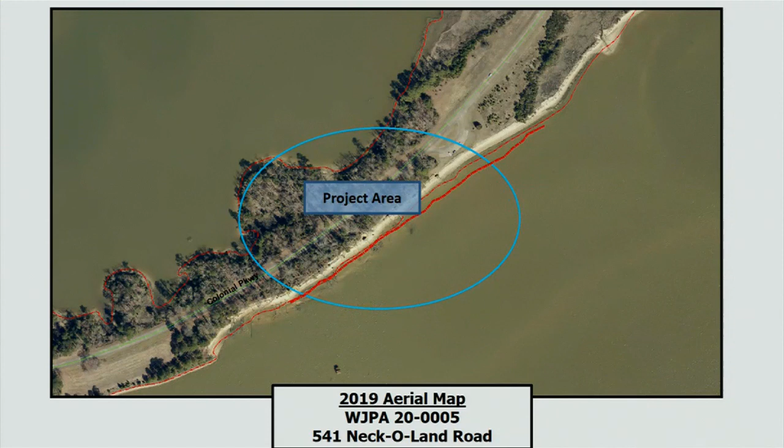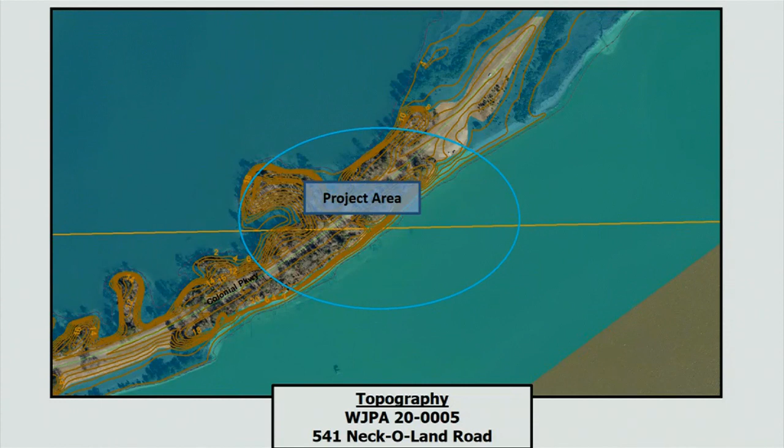Floodplain as it affects this property, and the topography. As it sits right now, it's a fairly steep bank with clear signs of incision and erosion affecting structural stability and safety along the beachway.

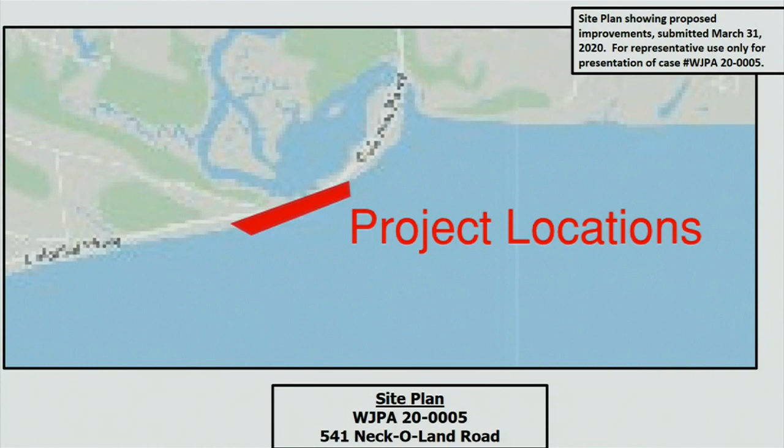The red portion above is the project location. Again, there are two separate locations, but in general, this is the project location. Location 1 above shows the first area in question. Structural stability of the parking lot shown above is the reason for the revetments in this area. A cross section of the sandbag revetments is listed above.

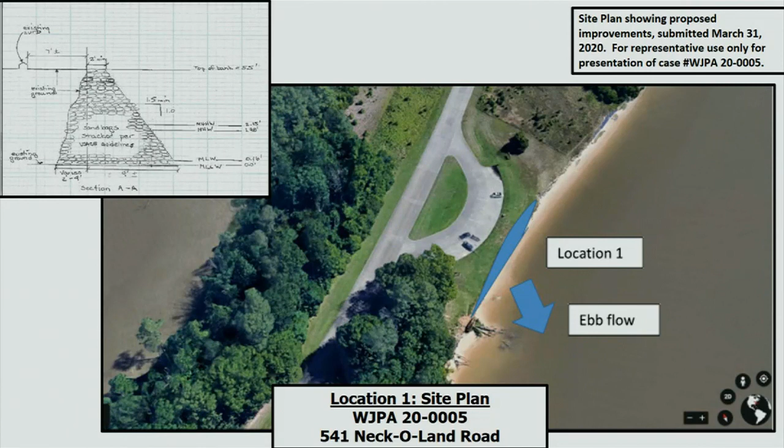And location 2, a couple hundred feet down the beach of the original location.

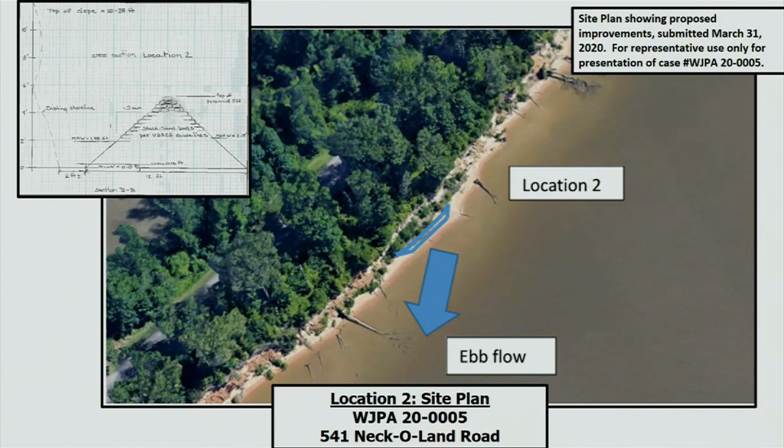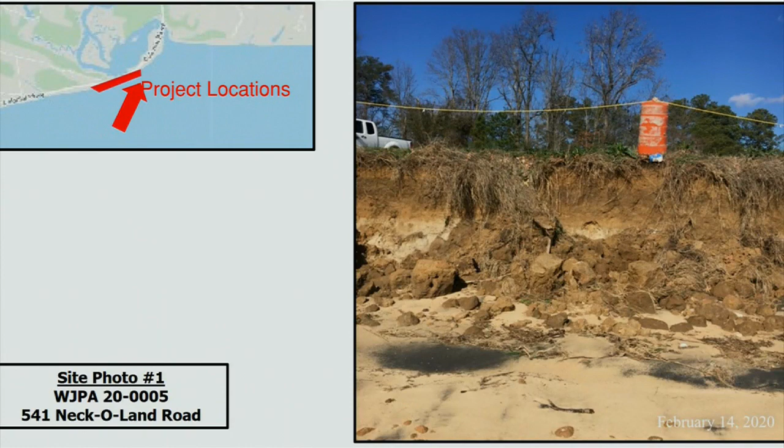Some site photographs of location 1, as you can see, just above the incision and the erosion, trucks parked in the parking lot. Moving down the beach, showing the erosion and the extent, you can see the downed trees, both furthering and inhibiting erosion.

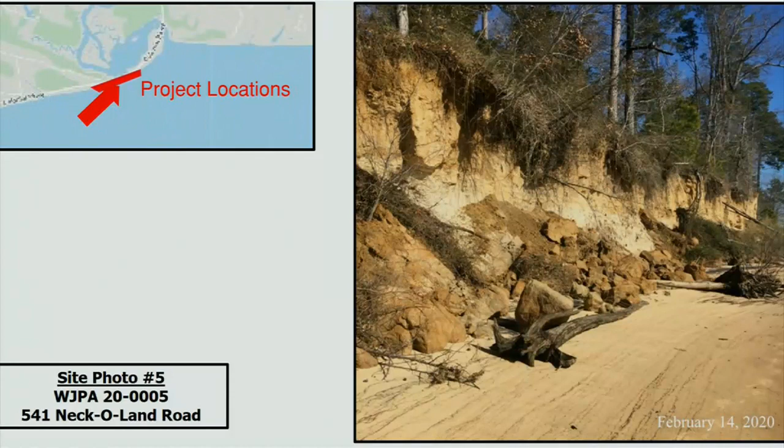And as we grow closer towards the extent of location 2, and coming back down the beach, that would be the last portion. This is a small breakwater system that is acting as an erosion prevention method currently at that portion.

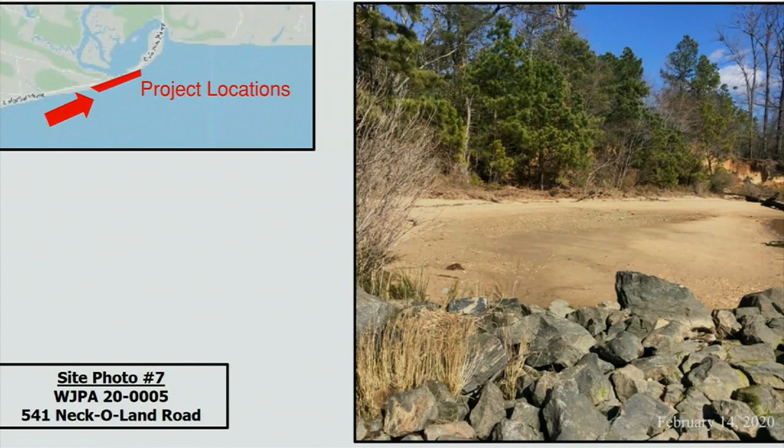Again, staff does recommend approval of this project, given that the applicant obtain all other necessary local, state, and federal permits required, that the development activities located in the special flood hazard area comply with Article 6, Division 3 of the floodplain area regulations, and this permit request become null and void if construction has not begun by May 13th, 2021, with written request for extension submitted to the Stormwater and Resource Protection Division no later than April 1st, 2021.

Now I'd be happy to take any questions the board has. Temporary, what does that mean? How temporary is this going to be? It looks to me like it's going to be there a long time.

Mr. Chair, I can answer that question. The Park Service does have the intent to put in breakwater structures in the future. It's funding dependent. The two locations they've chosen for this project, the first one protects the parking lot, and there is a structure on the bluff in the location of the second breakwater or revetment. That's why they chose those two specific locations. Thank you. Thank you very much.

What is going to be done to the erosion on the banks? Is anything at all, or are you just doing the sandbag revetment? Currently, it's just the sandbags, just armoring the bank.

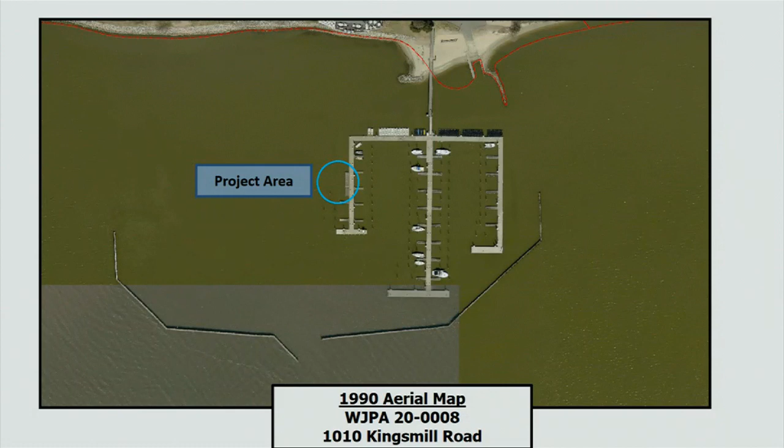As published in the Virginia Register, the revised wetland mitigation compensation policy and supplemental guidelines state that Virginia is committed to achieve no net loss in tidal wetland.

In order for a proposed project to be authorized to impact wetlands and compensate for the wetland loss in some prescribed manner, the following 3 criteria must be met.

All reasonable mitigative efforts, including alternative siting which would eliminate or minimize wetland loss or disturbance, must be incorporated into the proposal. The proposal must clearly be water dependent in nature, and it must demonstrate its need to be in the wetlands and its overwhelming public and private benefits.

Staff reviewed the application and finds that this project does meet all 3 of those criteria as outlined. As stated previously, there are no vegetated wetland impacts, thus no mitigation is required.

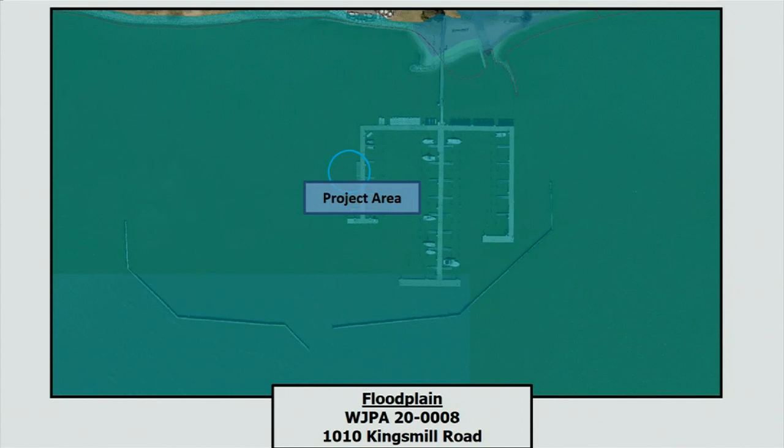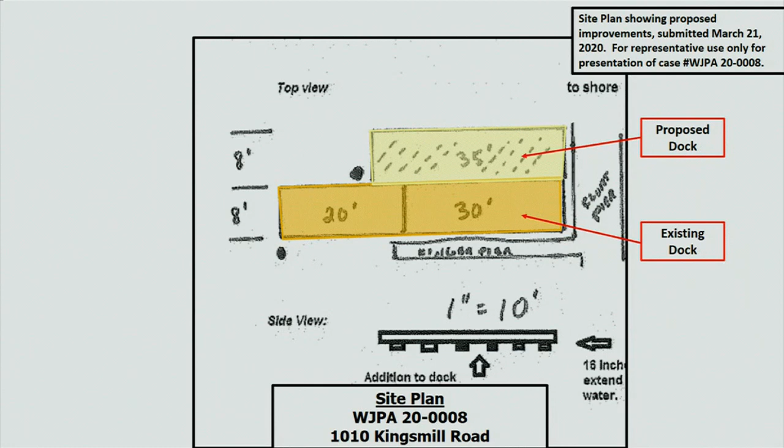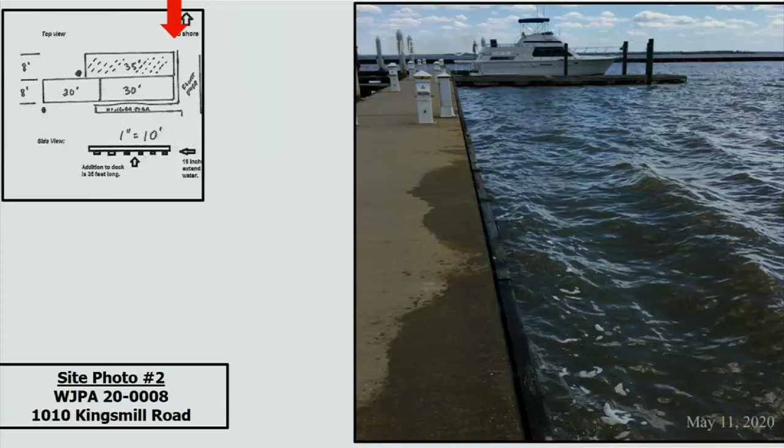According to the site plan submitted, there's an existing dock out there, and they want to add an 8 by 35 foot floating section immediately adjacent to it. This is a shot of that existing floating pier. In the permit conditions, staff does recommend approval.

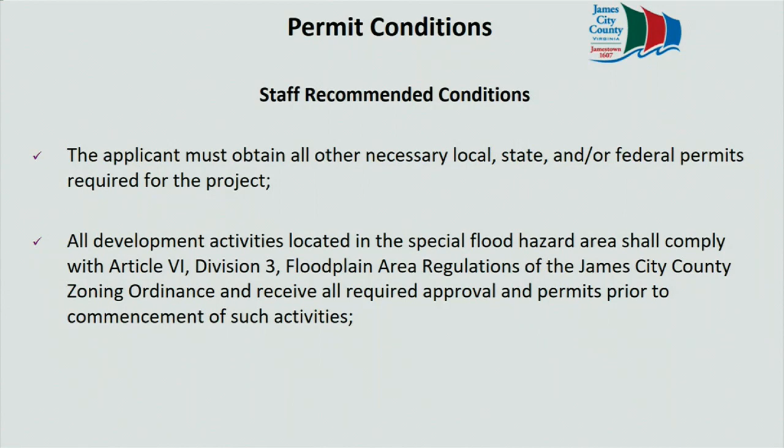The applicant must obtain any other necessary state, local, or federal permits as required, that any development located in the special flood hazard area comply with Article 6, Division 3 of the floodplain area regulations of the county, and that a site plan be submitted to the planning division due to the commercial nature of the marina.

The wetlands permit shall expire on May 13, 2021, if construction is not begun, and if an extension of the permit is needed, it should be submitted to our office no later than April 1st, 2021, 6 weeks prior to that expiration date.

I'd be happy to answer any questions the board may have regarding this application. Questions?

Thank you, Mr. Wilson. At this time, we'll open the public hearing. Anyone here wish to speak to this application? Seeing no one come forward, we'll close the public hearing.

Discussion from the board. How do you feel? Straightforward. You ready to vote? I'll make a motion.

Mr. Chairman, motion to adopt the resolution to grant the permit for Wetlands Board case WJPA 20-0008 at 1010 Kingsmill Road. Mr. Waltrip? Yes. Mr. Roadley? Yes. Mr. Guessman? Yes. Mr. Apperson? Yes. Mr. Dunn? Yes. Motion carries.

Board considerations, we have a presentation.

Good evening, gentlemen. Before you is a resolution to adopt a remote participation policy for the Wetlands Board. Given the current health crisis, staff thought it would be appropriate for the board to adopt this policy in the event a board member wishes to participate remotely.

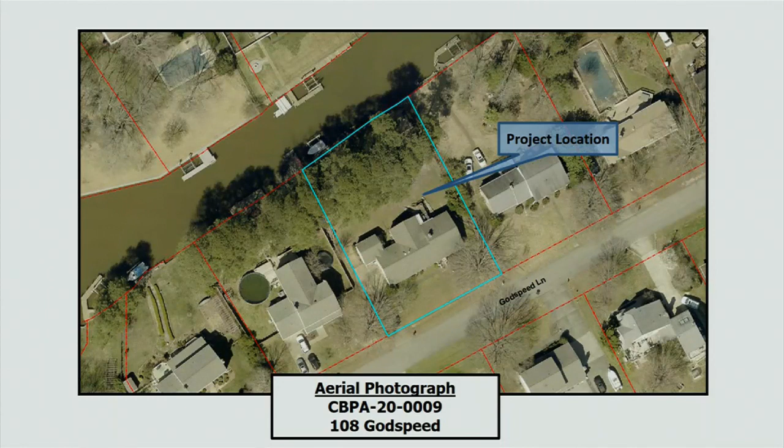The applicant is proposing to construct a 730 square foot deck to accommodate future accessibility, including a ramp to access the proposed upper deck from the proposed lower deck. A hot tub area is also included with the proposed lower deck. There is an existing 250 square foot deck on the property that the applicant intends to remove as part of this project, equating to a total of 480 square feet of new impervious surface associated with this project proposal.

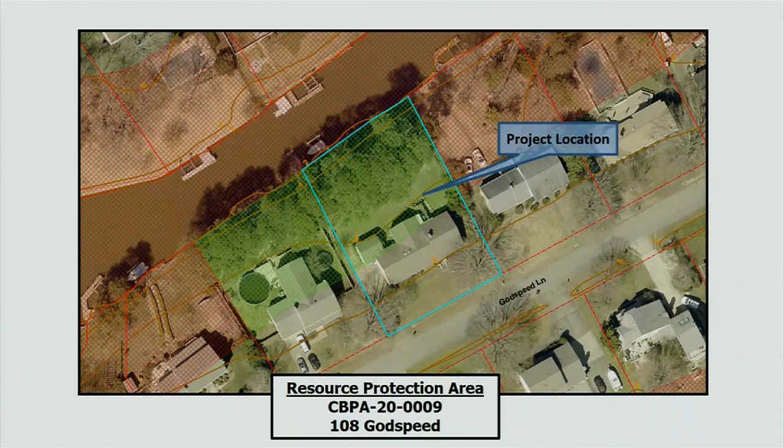The applicant has proposed the plantings of 2 canopy trees, 4 understory trees, and 6 shrubs. Staff has evaluated the application and exception request for the construction of this deck. This application meets the ordinance conditions in sections 23-11 and 23-14 and should be heard by the board because the deck is accessory in nature.

The board may grant exceptions to 23-7 if the application meets the following 5 conditions. The board may grant the exception request if it is the minimum necessary to afford relief.

Granting the exception will not confer upon the applicants any special privileges denied by Chapter 23, the Chesapeake Bay Preservation Ordinance of the James City County Code, to other property owners similarly situated in the vicinity. The exception request will be in harmony with the purpose and intent of Chapter 23 of the James City County Code and is not of substantial detriment to water quality.

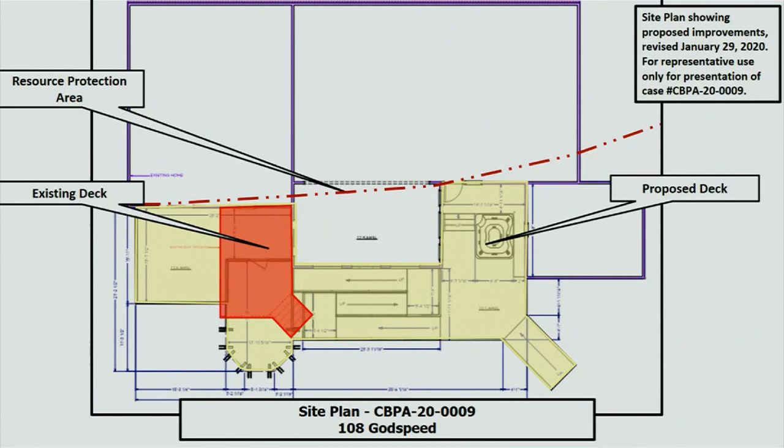Above, I have some site photographs, in addition to a 3-dimensional site plan that the applicant has provided to us. Again, you can see the ADA accessible ramps going from the ground to the lower deck and then up to the higher deck.

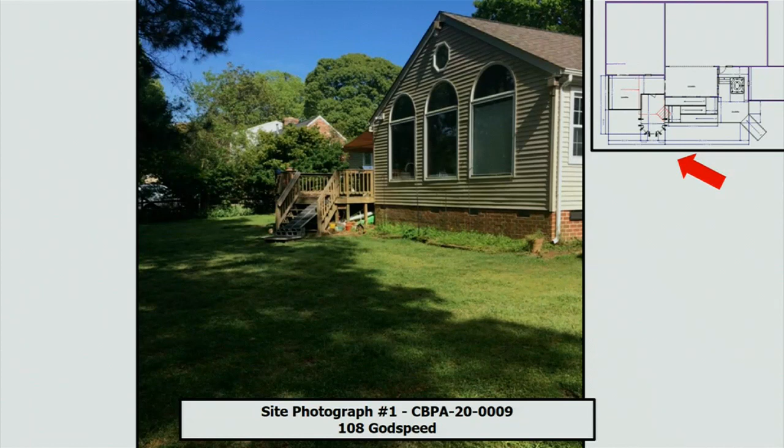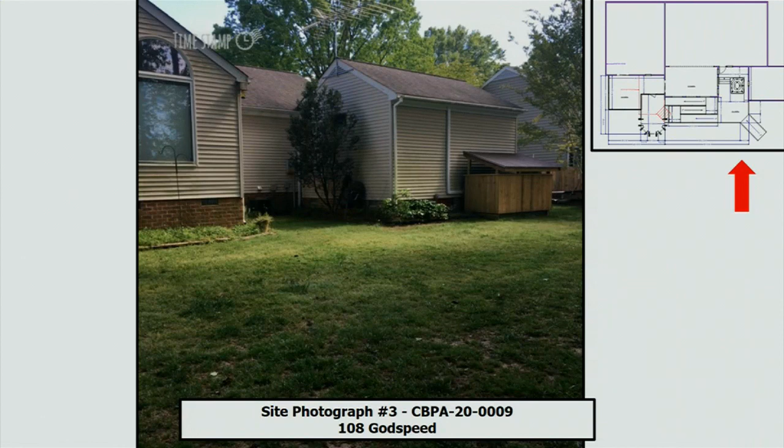Above you can see the existing deck that plans to be replaced. From the side of the house, looking from what would be the lower deck up into the higher deck. This area would be the lower deck, the ADA ramp, and the hot tub area. Again, the existing deck that plans to be replaced with the seating area. And viewing from the opposite direction, so from the higher deck down to the lower deck.

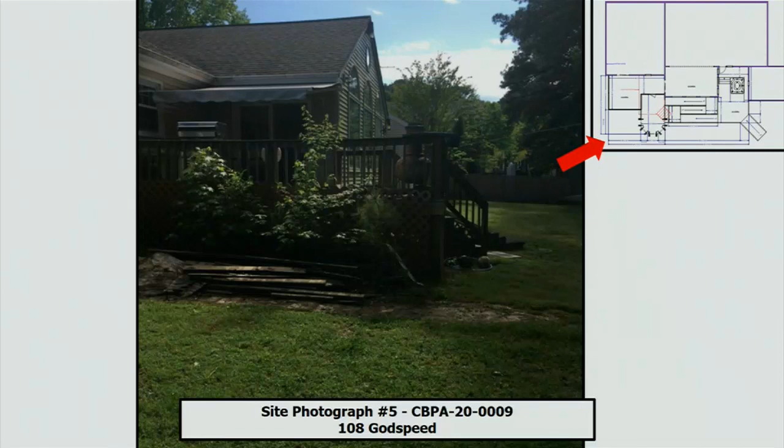Again, should the board wish to approve this exception request, all necessary local, state, and federal permits will be required. All development activities located in the special flood hazard area shall comply with Article 6, Division 3 of the James City County Floodplain Area Regulations.

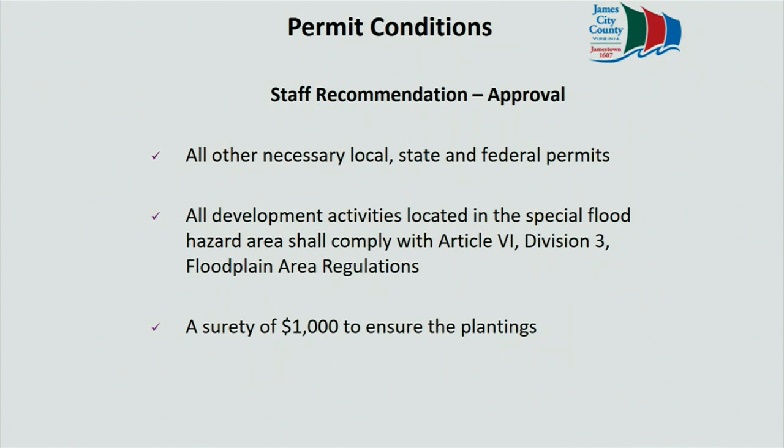That a surety of $1,000 to ensure the plantings of mitigation is required. Mitigation of 2 canopy trees, 4 understory trees, and 6 shrubs as provided by the applicant. And this exception request approval shall become null and void if construction has not begun by May 13th, 2021, with written request for extension submitted no later than April 1st, 2021. Thank you very much, and I'd be happy to answer any questions that the board may have at this time.

Go back to the slide that shows the overhead there, the basic plan first. I'm curious about how much of the construction is a ramp. It looks, okay, back up, go ahead one now. Go ahead, one. Yes, sir. That right there, okay. Looks to me like a great deal of this construction is simply ADA ramps. Yes, sir, that is correct.

The majority of the existing house is protruding. Just adjacent to that will be completely all ramps. Thank you.

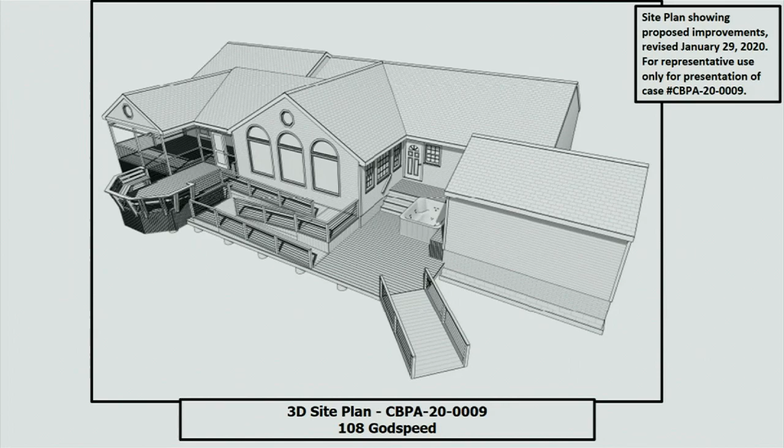I'd like to say I went out and looked at the piece of property too, and looking at the setback, 50-foot encroachment, seemed like it kind of favored this house more than anybody else, because it seemed like it swung in this area, and ramps for the handicap, they had to more or less do it this way to make this thing work. I couldn't see myself jeopardizing having that available to the family for wheelchair accessibility. It's really so.

Any other questions for staff? Okay, at this time, I'd like to open the public hearing. Would the applicant like to address the board?

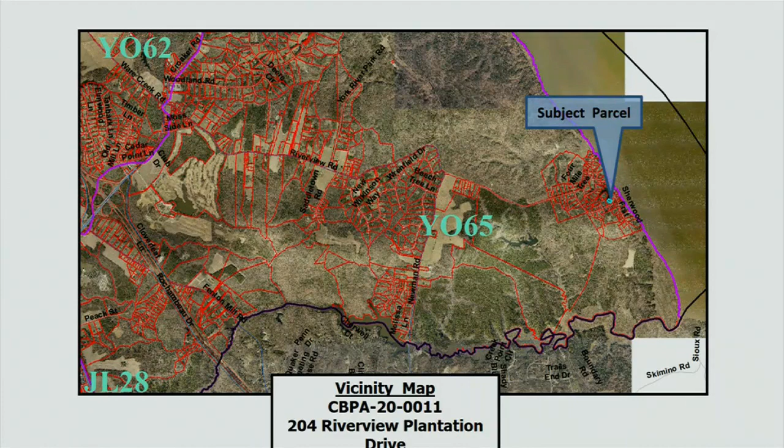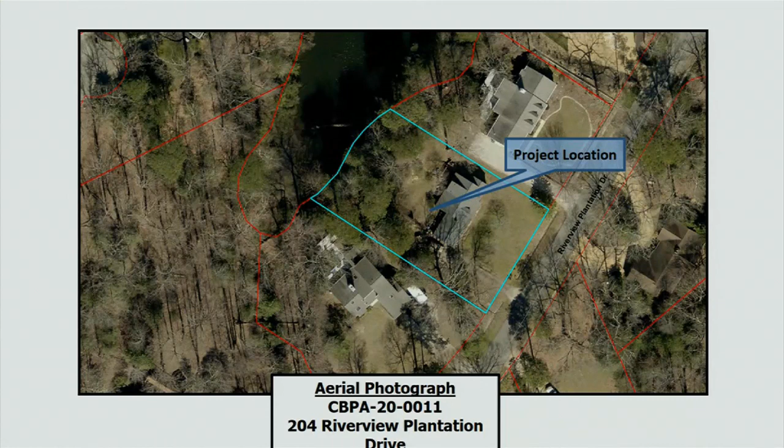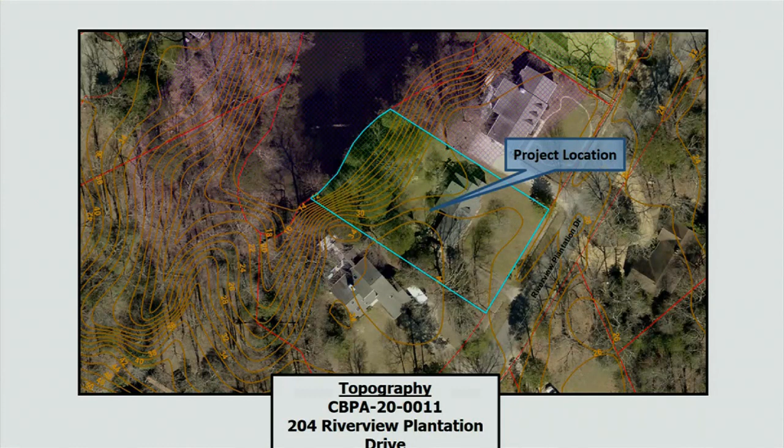The vicinity map above shows the general location and surrounding area of Riverview Plantation. This parcel was platted in 1963, prior to the adoption of the Chesapeake Bay Preservation Ordinance in 1990. Total lot size of this property is 0.47 acres, of which 55% is located within the RPA. Topography on the lot generally slopes back towards the tail end of the property and is flat approximately where the house is.

Again, the resource protection area affects this portion of the lot, encroaching up into the house and the general vicinity where this project proposal comes into play. The applicant is proposing to expand a bathroom on a currently existing single-family dwelling located on this property. The expansion equals a total of 228 square feet of additional impervious surface, and the required mitigation for this amount of impervious surface within the RPA equates to 1 canopy tree and 3 shrubs.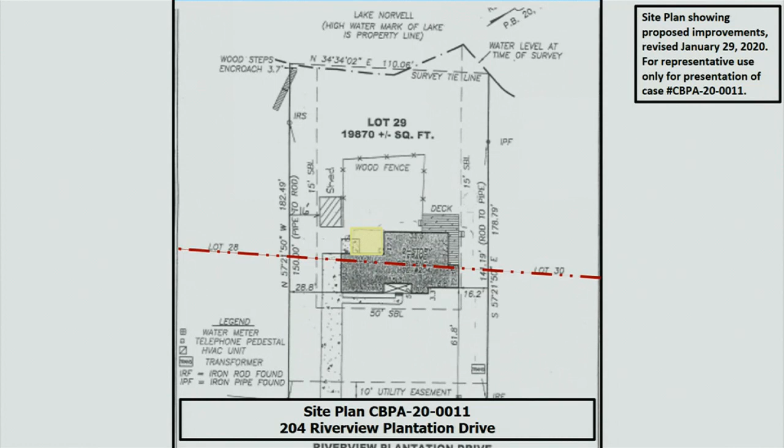A mitigation surety will be required in the amount of $250, in a form acceptable to the James City County Attorney's Office, to guarantee the plantings of this mitigation. The site plan above shows this proposed expansion with the resource protection area as it affects this property highlighted in red, and the proposed expansion here in yellow.

Staff has evaluated the application and exception request for the bathroom expansion. This application meets the ordinance conditions in sections 23-11 and 23-14, and should be heard by the board because the construction expands on a currently existing structure and encroaches further into the resource protection area.

The board may grant exceptions to section 23-7 if the application meets the following 5 conditions: the exception request is the minimum necessary to afford relief; granting the exception will not confer upon the applicant any special privileges denied by Chapter 23, Chesapeake Bay Preservation of the James City County Code, to other property owners similarly situated in the vicinity; and the exception request will be in harmony with the purpose and intent of Chapter 23 of the James City County Code and is not of substantial detriment to water quality.

This exception request is not based on conditions or circumstances that are self-created or self-imposed, nor does it arise from conditions or circumstances, permitted or non-conforming, related to adjacent parcels, and reasonable and appropriate conditions are imposed which will prevent the exception request from causing a degradation of water quality.

Staff's view of this application is that it does meet all 5 of the conditions as presented above and recommends approval of this exception request.

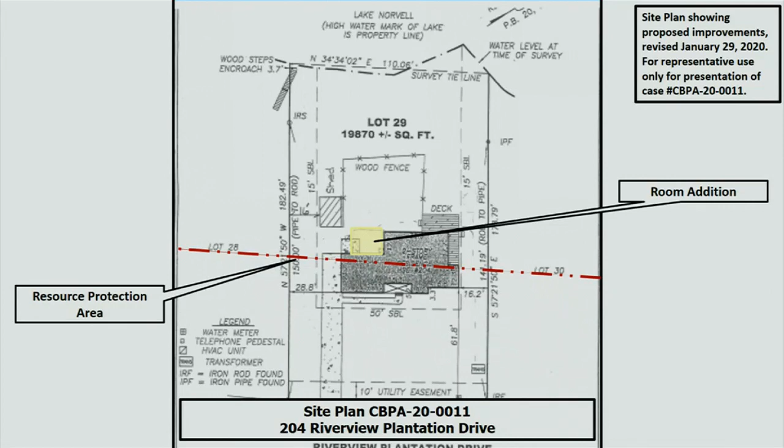This exception request approval shall become null and void if construction is not begun by May 13th, 2021, with a written request for an extension submitted to the Stormwater and Resource Protection Division no later than April 1st, 2021, six weeks prior to the expiration date. Above, I have some site photographs from this parcel.

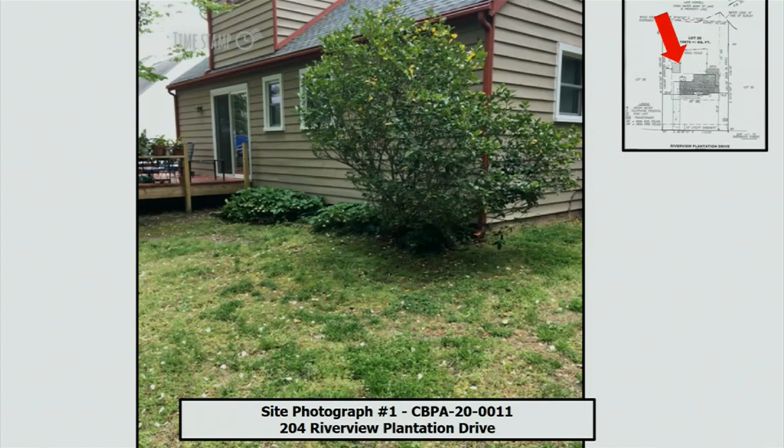General area of the expansion in the garden, located here, and from the side, a view of this.

Again, should the board wish to approve this proposal, all necessary local, state, and federal permits shall be required. Plantings of 1 canopy tree and 3 shrubs to ensure mitigation, with a surety of $250 to ensure these plantings, and this exception request approval shall become null and void if construction is not begun by May 13th, 2021, with written request for extension submitted no later than April 1st, 2021.

Thank you very much, and I'd be happy to answer any questions the board has. Any questions for staff? Could you go back to the last photo?

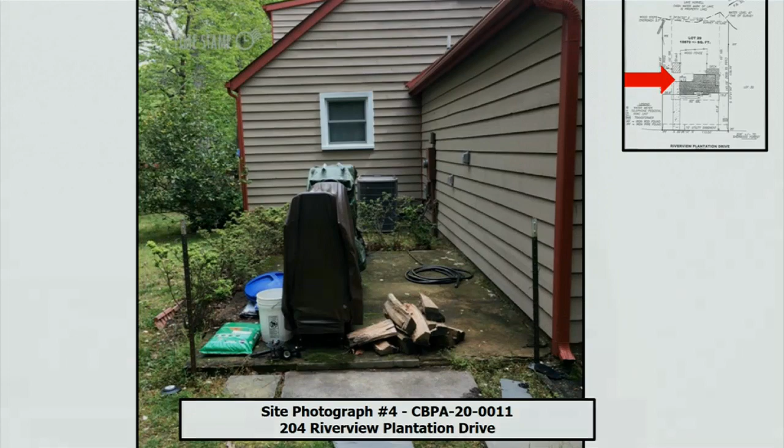That concrete patio right there, is that a concrete patio? I believe so, yes sir. Is that gonna remain in its entirety, or is part of that gonna come up? It's my understanding that it will not remain, however I'll let the applicant address that. I was wondering if that changed the size of the impervious area. Yes, I think the applicant would best answer that.

Okay, at this time I'd like to open the public hearing. Would the applicant like to come forward to address the board?

Just state your name for the record. Curtis Lumley, 204 Riverview Plantation. Yes, the concrete will be out of there.

The reason is, I had to leave room for the HVAC, the power company coming in. They're gonna have to run the line behind the house, and we're gonna have to go to the driveway, come in, then put a new meter a foot off the corner of the house.

Any other questions for the applicant? So one of the concerns I routinely express for encroachment into the RPA is treating stormwater runoff. I noticed in this picture your gutter just outfalls down onto the ground and then sheet flows. Have you noticed any erosion there, or is your land okay?

My land is nice. You got about, I think it's 50 feet down to the water, and it's full of trees. You're not seeing any real erosion or anything of that nature? Not at all, I maintain all turf anyway. Okay, very good, thank you.

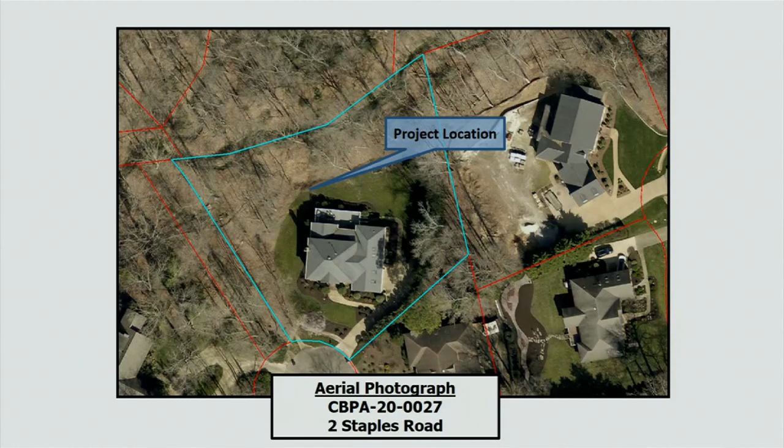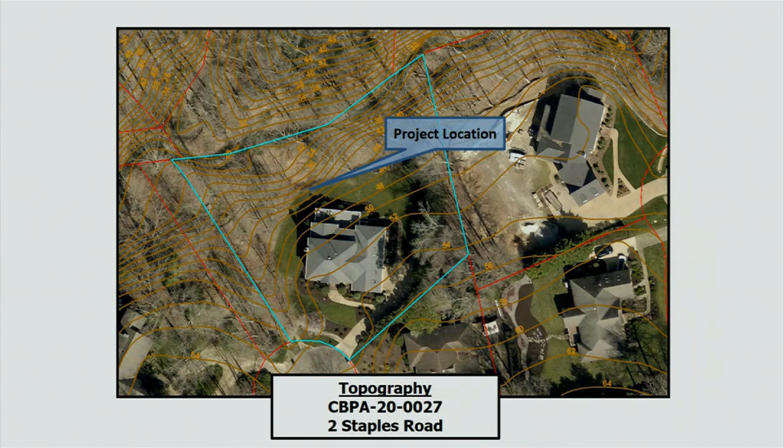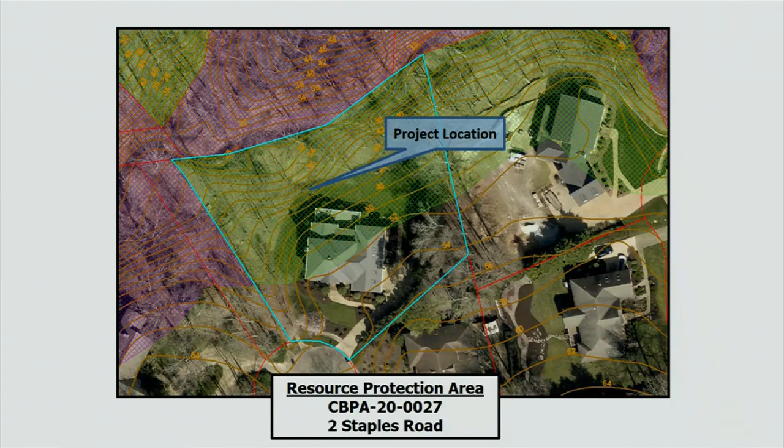Existing topography of the site slopes fairly significantly to a steep ravine in the rear of the property that forms the rear property line, the center of the channel. RPA as it affects the property affects approximately 72% of the property. This property was platted in 1974 prior to the adoption of the Chesapeake Bay ordinance.

From the submitted site plan, we have the 50-foot RPA and the 100-foot RPA, proposed retaining wall, and proposed patio. Total lot size for this property is 0.85 acres, of which 72% is within the RPA.

The applicants are proposing the construction of a 50-foot retaining wall within the seaward RPA in order to address erosion issues that the owners have been experiencing. Additionally, the applicants are proposing the construction of a 210 square foot patio within the landward 50-foot RPA in order to accommodate a fire pit.

Along with the addition of the proposed impervious surfaces, the applicants have agreed to remove 20 square feet of a wooden timber wall that currently surrounds a garden area. Total new impacts to the RPA equal 240 square feet.

Required mitigation for this amount of impervious cover within the RPA equates to the planting of 1 canopy tree and 3 shrubs. The mitigation surety for this would be in the amount of $250 in a form acceptable to the county attorney's office.

Staff has evaluated the application and the exception request and determined that this application should be heard before the board because the construction of the retaining wall and the patio are considered accessory structures.

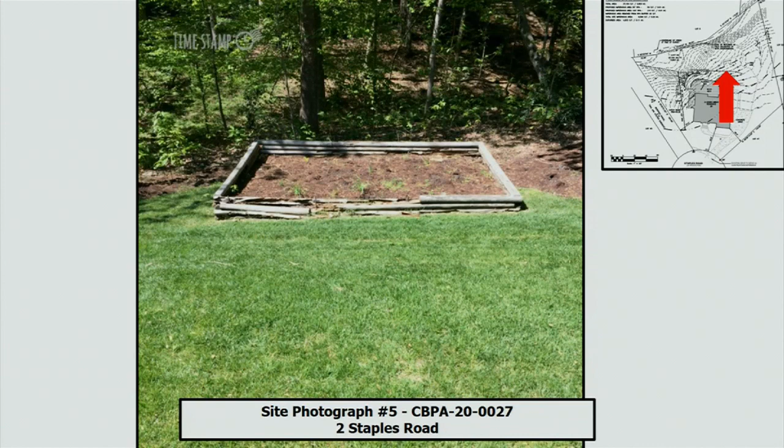Here are some site photographs, location of the proposed patio in that turf area. Proposed retaining wall. That turfed area is sloping, and there's some erosion coming from the left to the right. Another view of that. And the proposed 20 square feet of timbers that would be removed.

Again, staff's recommendation is approval with these conditions: that all other permits, local, federal, state, are required; planting of 1 canopy tree and 3 shrubs; a surety of $250 to guarantee the mitigation; that the exception request become null and void 1 year from tonight, May 13th, 2021, and a written request be submitted no later than April 1st, 2021.

Be happy to answer any questions the board may have regarding this application.

Wilson, can you address the severity of the erosion that you witnessed? I would defer that question to Mr. Roth, who's here on behalf of his clients.

Okay, at this time I'd like to open the public hearing. Would the applicant or the applicant's representative like to address the board?

I like to talk with my hands, and I'm going to have to hold a folder, so I may have a speech impediment. I'm Matt Roth, president of Roth Environmental, 700 Prescott Circle, Newport News, Virginia. I'm here this evening to present on behalf of the Kangs at 2 Staples Road. Staples Road, not Staples Mill Road. Oh, did I say Staples Mill? Yeah, I apologize. That's okay. I thought you did that just for me.

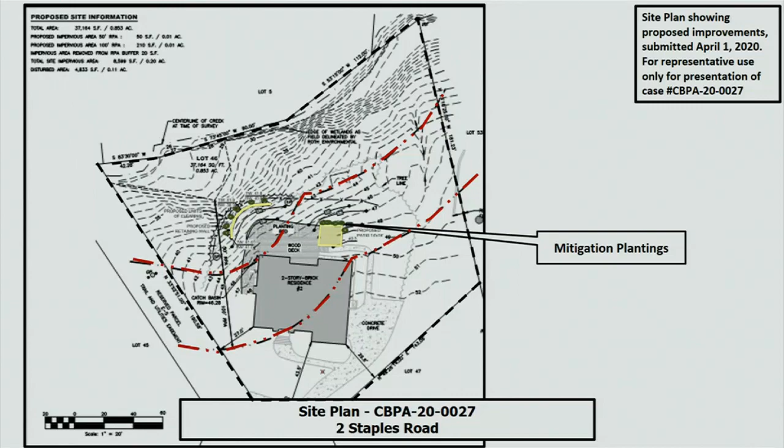One of the big problems that causes a lot of erosion is their lawn maintenance company takes equipment around there and it slides down the slope.

So constructing a 3 to 4 foot small wall in that area will level that area out. You won't have the equipment sliding down the slope, and you'll also be able to slow the velocities of the water.

They'll put some 57 stone in behind the wall, so on a normal storm event you'll have infiltration of that water behind the wall, and you'll have weep holes at the bottom that'll allow it to come out at a much slower rate than it's coming down the hill now.

As far as the patio goes, they wanted to do a fire pit, like a stone fire pit, and that's not necessarily conducive to doing on a wooden deck. So we talked about doing a small patio.

The original proposal was a little bit larger than this. We were able to get them down to 210 square feet, basically 15 by 14. That would give them room for a stone fire pit, a small table, and a couple chairs.

The mitigation is actually a little bit different than what you had put up there. They had proposed 11 shrubs instead of the canopy tree and 3 shrubs. Once you get into the rear portion of the yard, it's mature forest once you're beyond the clearing limits.

So what they're planning on doing is putting some shrubs around the base of the retaining wall to stabilize the area there, and also putting shrubs on the northern side of the proposed patio with a small area of mulch that connects all the shrubs, so any runoff coming from the patio will have to go through that mulch and over the shrubs area. That'll help stabilize the soils there.

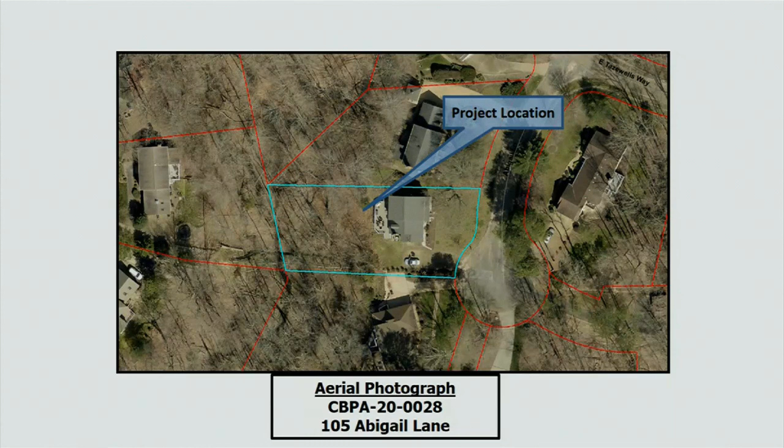Subject parcel here outlined in blue. Close up showing the property. There is a sanitary sewer line that runs on the southern property line.

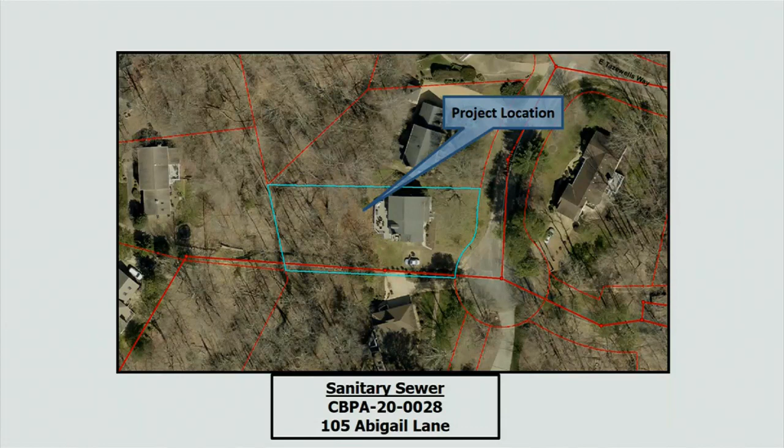Topography as it affects this property. There is an existing deck on the back of the property, and the slope takes off fairly significant once you get to that deck down to the bottom of the ravine.

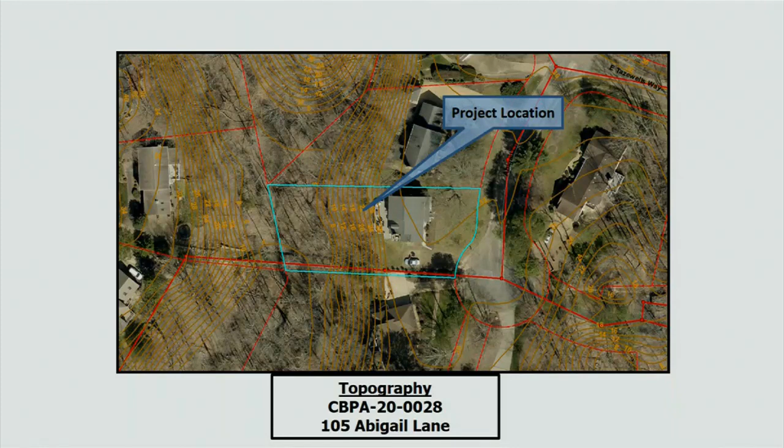RPA as it affects this property is approximately 74%. From the application, the 2 retaining walls are outlined here in yellow, the RPA in red. And then at the southern end, or the bottom end, of the first yellow retaining wall, there starts the JCSA easement. It's 10 foot on her property, 10 foot on the adjacent property.

So the total lot size for this property is 0.43 acres, of which 74% is located within the RPA. The applicant is proposing the construction of 2 retaining walls equating to 137 square feet within the landward 50-foot RPA in order to address erosion issues that the owner has been experiencing. Staff has made 2 site visits with the applicant during 2019 to discuss the issue.

The required mitigation for this amount of impervious surface equates to planting of 3 shrubs. Mitigation surety will be required in the amount of $250 acceptable to the county attorney's office.

Staff's evaluated the exception request and has determined that the application should be heard before the board because the construction, the retaining walls, are accessory structures. The board may grant exceptions to Chapter 23-7 if the application meets the following 5 conditions.

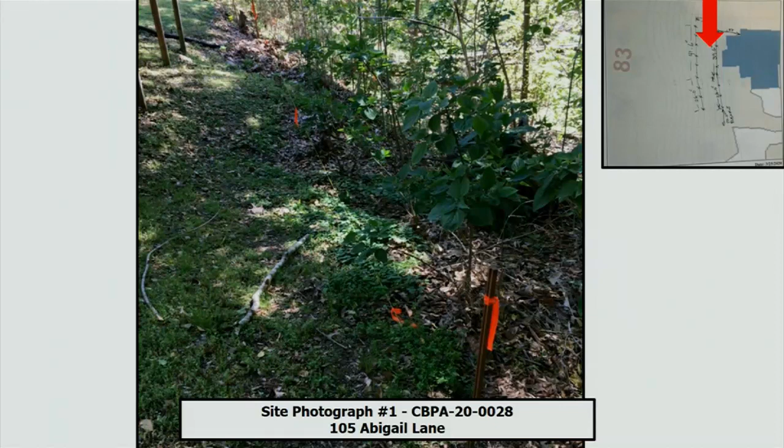Site photographs, the contractor was nice enough to flag the retaining wall in the field. The upper wall is shown here, running at the edge of the wood line. I believe those are pawpaws just to the right of the string line. And you can see some footers from the deck up in the upper left corner of this photo.

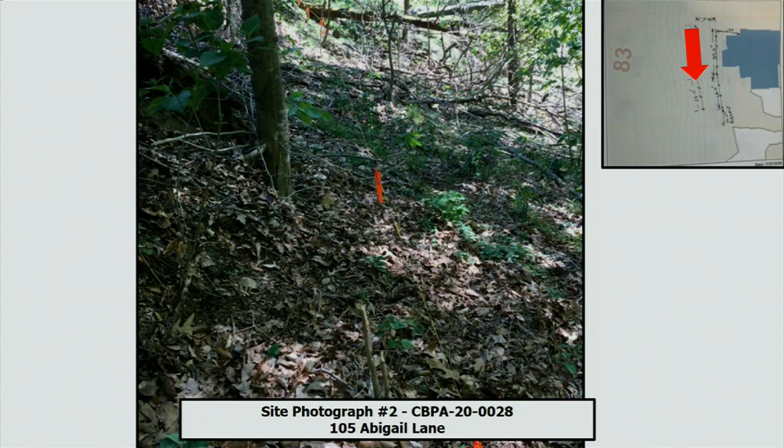Looking the other way, again, the string line is the location of the wall. This would be the second wall. The upper wall again.

And up in the upper right-hand corner are those deck footers. And those footers have been exposed from erosion. About 6 to 10 inches of concrete footer has been exposed.

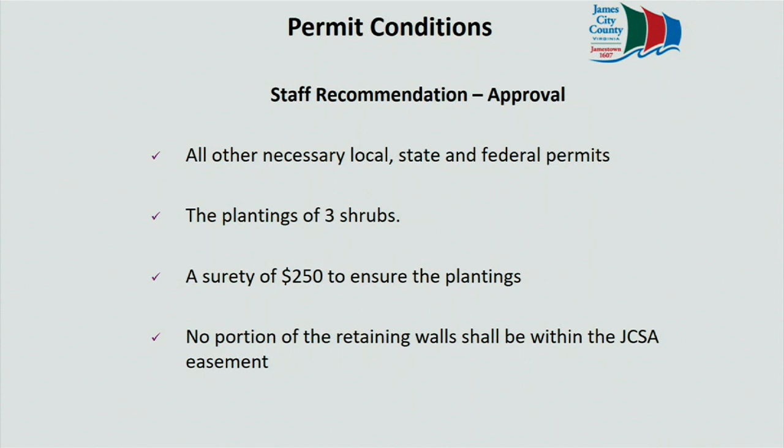Staff does recommend approval with the following conditions: all other necessary local, state, and federal permits as required, the planting of 3 shrubs, a surety of $250 to ensure the mitigation plantings, that no portion of the retaining walls be within the JCSA easement. The exception request shall become null and void if construction is not begun within 1 year from tonight, May 13, 2020, and if an extension request is required, that be made to our office no later than April 1st of 2021. Happy to answer any questions the board may have.

Any questions? Mr. Wilson: again, I'll ask, can you evaluate the slope erosion, not so much the erosion occurring adjacent to the footers, but this series of retaining walls extending down the hillside, is there slope erosion on that hillside? There is. It's hard to quantify because there's a lot of shrub and weed growth, vines and some greenbrier, if memory serves, in that location. The steepness of the slope also precludes safely walking around the deck.

Well, could this protection of the footers be handled or accommodated through a retaining wall within the yard, similar to what was done on the last application? I will defer to the applicant. All right, questions for staff?

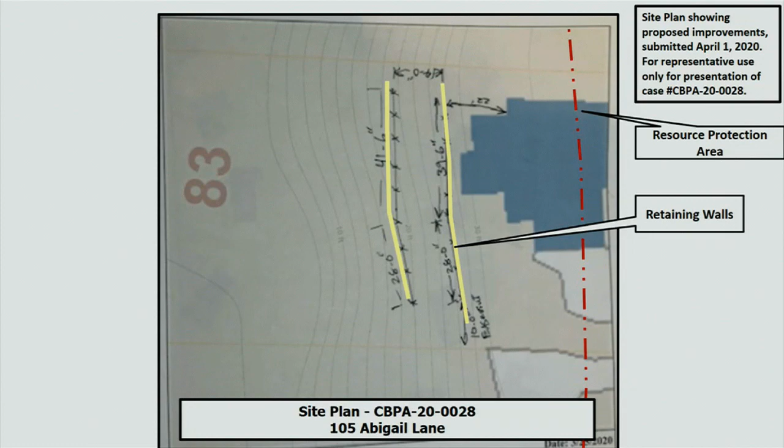Now keep in mind, the wall is not a consistent height. It's only where - if you can go back to the picture where the walls are highlighted in yellow - right there, if you notice kind of in the center of the walls, there's a slight angle where they change directions. That's the highest point of both walls because of the natural erosion taking place on the property. They basically go from that highest point, which would be about 36 inches, to almost nothing on both ends. So I hope I'm answering your question in regards to why I feel the second wall is necessary to reinforce the first wall.

I noticed there's quite an elevation drop between the two walls. How high is the second wall, the downhill wall? At its highest point, it won't exceed 36 inches, and that's just to let us get an even grade to reinforce the upper wall. How are these built, sheet pile or stone? These walls will be wood in nature, ground contact wood, 6x6 posts in the ground, with 2x8 material on the backside to support the sediment. There will be kickers at the highest areas where necessary to help support the wall before the new sediment's put in place.

In the area between the walls, what is your proposed use for that area? Are they going to let it go back to natural? It's going to be natural. We plan on covering it with coarse mulch to help stabilize the sediment as well as the plantings to give the root structure, to mitigate. My concern - I have no concern with helping protect the deck structure from the erosion around the footings. My concern is destabilizing that slope even further and aggravating erosion.

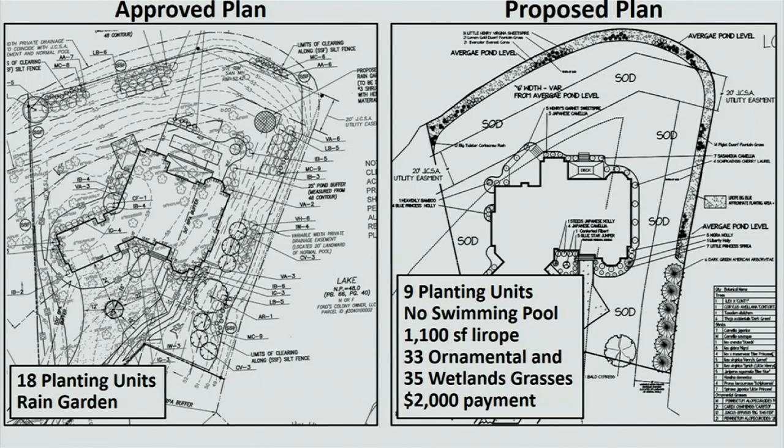I support the reestablishment of a continuous buffer on the shoreline or around the property edge, so I'm generally in support of this proposal. There is a 20-foot JCSA easement between the house and the lake that Mr. Nervitt has to contend with, as does every property owner around that lake. Just want to point that out. There are no large-scale canopy trees that could be planted in that area. It affects his plan.

Any other questions for the staff? I think Trevor made a comment a couple times, and I agree with him entirely. The drainage from outside areas that dumps into that pond is much, much more significant than anything would be from this property. I really think that's just a glorified sediment basin anyway. It's not really a pond to me, nothing that would carry the definition of a true natural area. I don't mean to be talking down about their pond, but what I see him doing here is nothing compared to the water that comes into it from other areas. That would be my position.

Mr. Wilson, that is a BMP, is it not? It is classified as a BMP. It was designed to treat stormwater. It was built with the construction of the golf course.

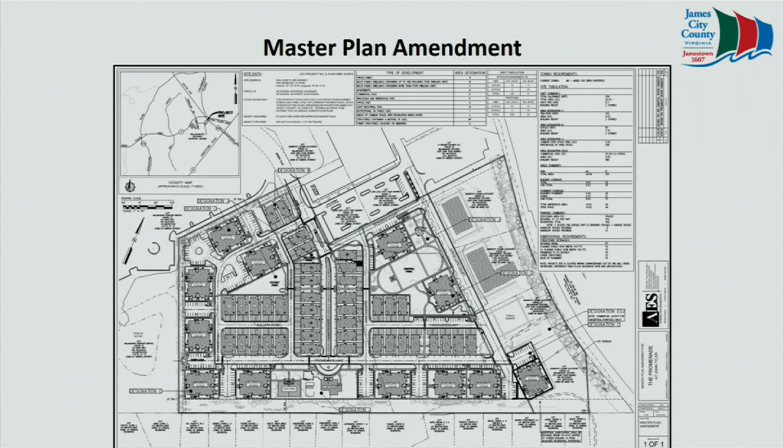The commercial parcel in question is at the upper portion, upper right-hand corner of the project. Zaxby's restaurant is immediately north of that. This is the commercial out parcel where the stockpile is proposed. This is from the master plan.

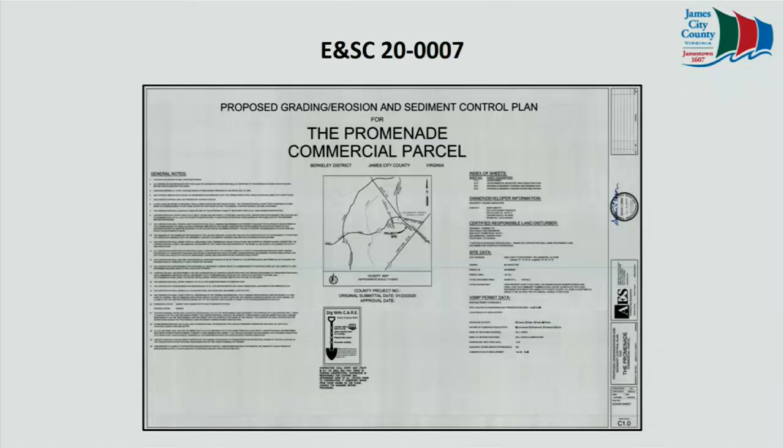And this is the erosion sediment control plan that was submitted, for that same parcel, showing limits of disturbance around the building pad and then a temporary topsoil stockpile area within the middle of that. They are grading ditches on both sides and installing a culvert pipe to safely contain or convey stormwater runoff from the project into the existing conveyance system, so it doesn't overwash the entrance road into the project.

From the ordinance, Sections 23-9, General Performance Standards, disturbance shall be limited to the area necessary to provide for the proposed use or development. Staff's contention is there has not been a proposed use for that commercial parcel.

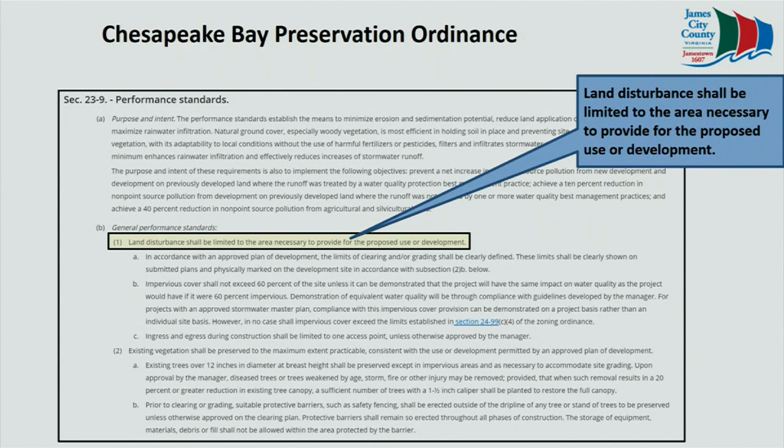Again, staff's guidance: the hardship is not generally shared by other properties in the vicinity. The Chesapeake Bay, its tributaries, and other properties in the vicinity will not be adversely affected. And the appellant acquired the property in good faith, but the hardship is self-inflicted.

I'd be happy to answer any questions. Mr. Graham Corson of AES is here, and while this is not a public hearing, it is staff's recommendation that he be allowed to speak on behalf of his client.

So I just want to make sure I understand this issue in front of us. You're not asking us about the adequacy of how they're going to keep the soil pile. It's just over the fact that, according to the ordinance, there has to be a proposed use before you can approve it, and you feel there is no proposed use. So regardless of how they're proposing to do it, that's not the issue. It's just this article—they haven't proposed how they're going to use it, what it'll be used for. Okay.

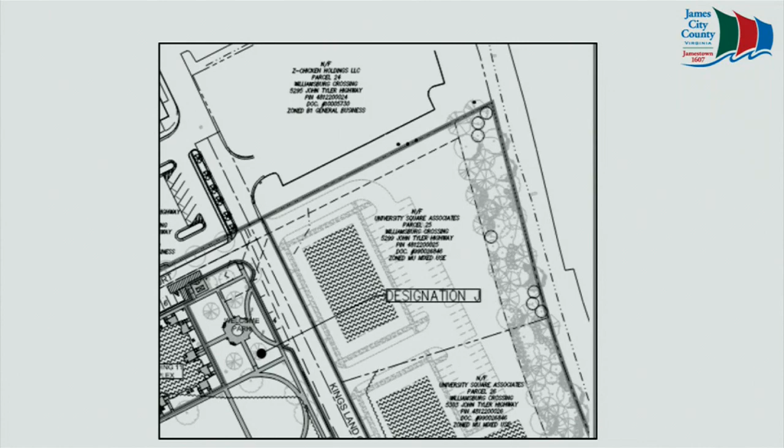So the staff does not consider that an approved plan? We did not. Thank you.

If it's—has it been approved? Master plan? Yes, sir. So those building areas that show on there have been approved, but wasn't it taken into consideration, is what you're saying, maybe? We did not feel that was an adequate plan of development.

Because it's just like a square footage. It's not saying here's a building, a specific building. It's just, hey, here's a box that we say. Here's a box, here's some parking.

There were no calculations for stormwater or anything of that nature from a typical site development standpoint submitted for this parcel, outside of the erosion and sediment control plan that was submitted.

Would a future building proposed for that site be required to meet the other standards that would need to be met? Yes, sir, those would kick in—it's not just passing this and leaving it open to do whatever you want. Correct, they would have to follow the master plan. If they deviated from the master plan, it would have to go back before the planning commission and the board of supervisors.

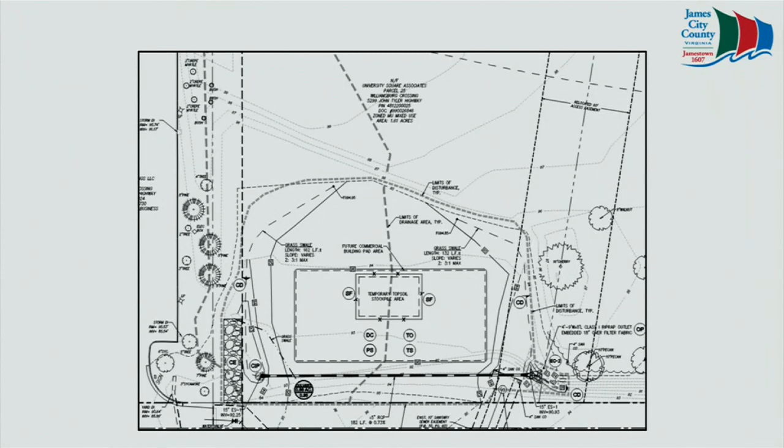Okay, any other questions? Thank you.

I don't see any environmental impact from this. Well, Mr. Chairman, I think staff's position on this project was that it wasn't under an approved plan of development, if I'm not mistaken. I understand their reasoning, but I would equate this master plan, considering it had an approved or at least conceptual drainage and treatment plan, to be an approved plan of development. So I'm inclined to support the request for the appeal.

Also, pulling all the dirt off-site and hauling it back, there are always impacts with moving that amount of soil, no matter how careful you are. If we approve it, what's to prevent them from stockpiling? Can we put something into the appeal saying you can bring it up to level and no more, so it doesn't become an issue? Well, they may want to surcharge a bit if putting that much fill, so I'd be careful about that. You've got truck traffic on the roads, and VDOT is involved with all of that too. As long as they keep it on the property, don't create a problem, and bring it up to grade, I don't personally consider that stockpiling.